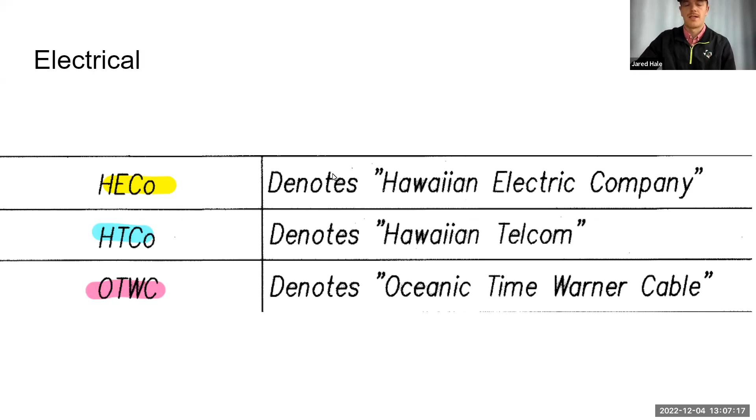The electrical takeoff is separated into three main companies: the Hawaiian Electric Company, denoted by yellow, the Hawaiian Telcom, denoted by blue, as well as the Oceanic Time Warner Cable, denoted by pink, as we'll see in the next slide. So throughout the project, we'll be excavating and installing three separate electrical duct lines.

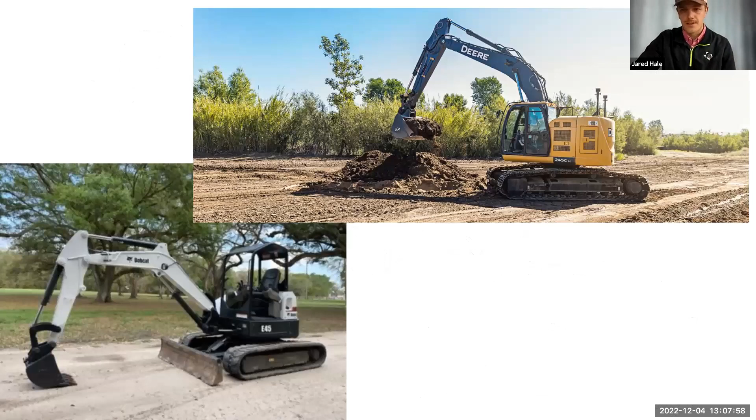The equipment that we'll be using to excavate the electrical ducts are the excavator and mini X. Where the lines are connected, all three of them together, we'll be using the excavator. And for when they're separated, as you can see in the middle of the page, we'll be using the mini X, and we'll be able to do this and save money and do it in a timely fashion.

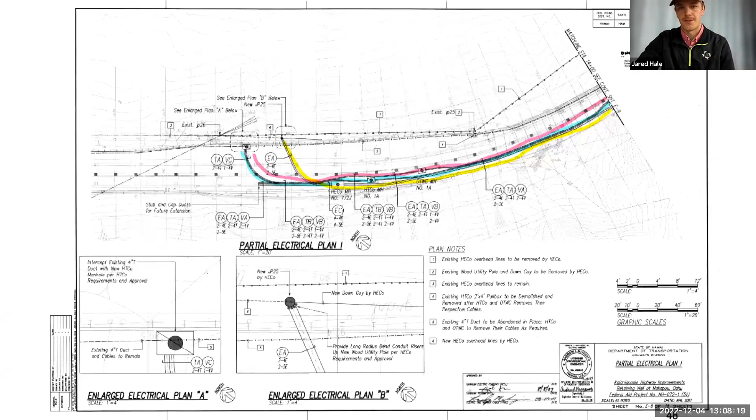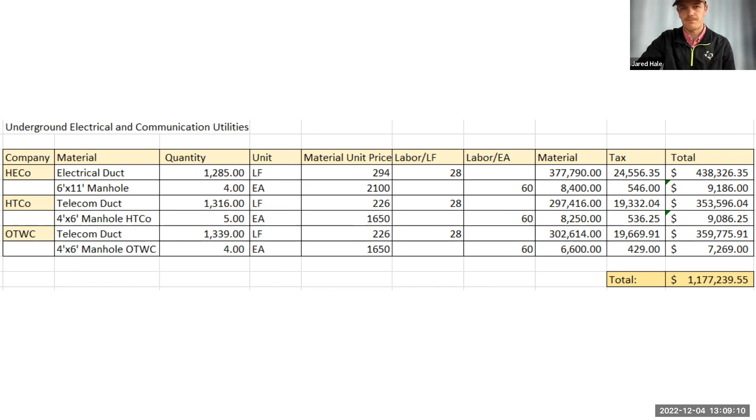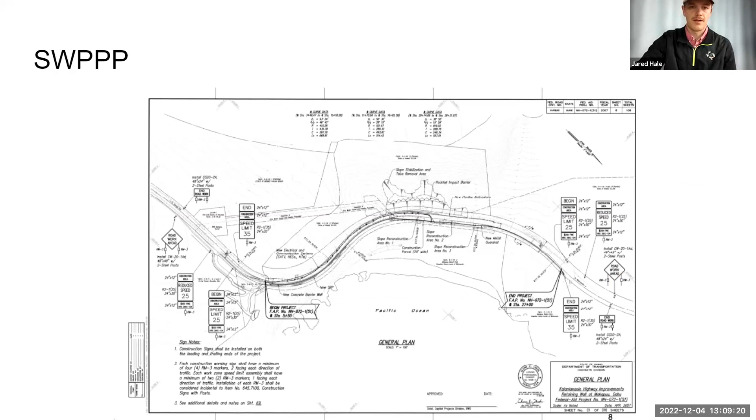Next we'll go over our SWPPP. This is just a picture of the general plan of our project. The SWPPP is separated into three main BMPs, best management practices: first, the filter berm, next, the silt fence, and finally, the temporary and permanent seeding.

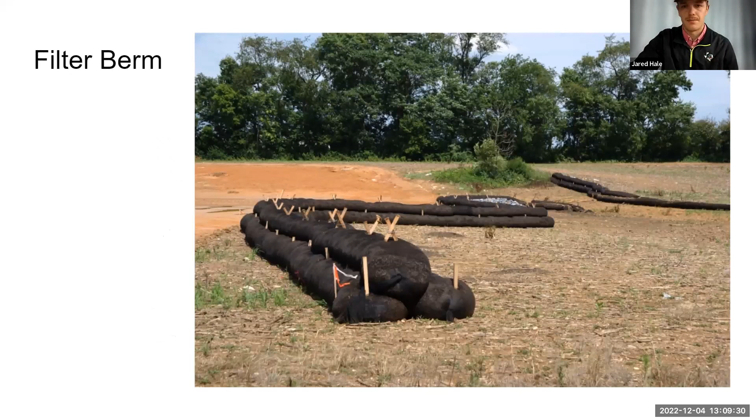The temporary and permanent seeding will be planted throughout the project along the sides of the roads, and this will help with sediment buildup and sediment pollution.

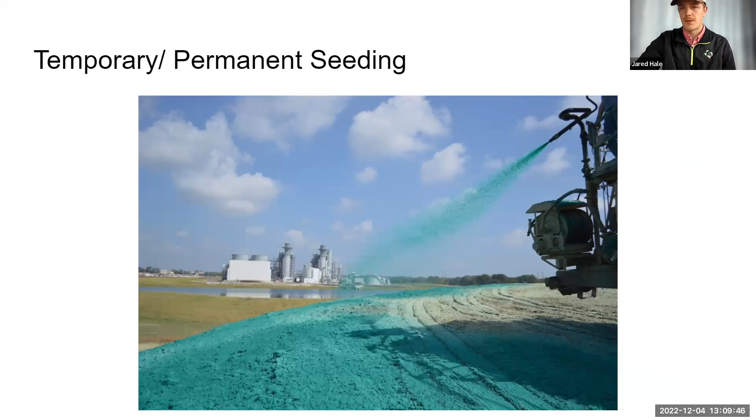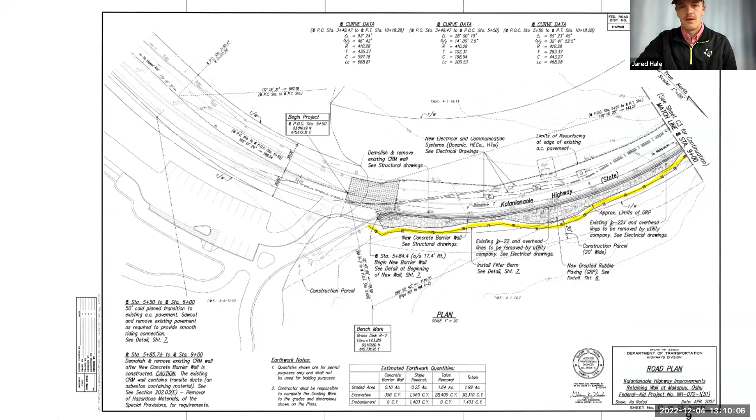So in order to keep these different BMPs in line and keep them viable, we have set up a plan to make sure that those things stay properly installed. At least once a week, we will be checking and inspecting the BMPs, and then within 24 hours of a rainfall of half an inch, after we found something that may need to be fixed, we will need to fix that within 24 hours.

We will be checking the silt fence for holes, and if sediment is up to 1/3 of the height of the fence. Temporary seeding will be checked for bare spots, washouts, and healthy growth.

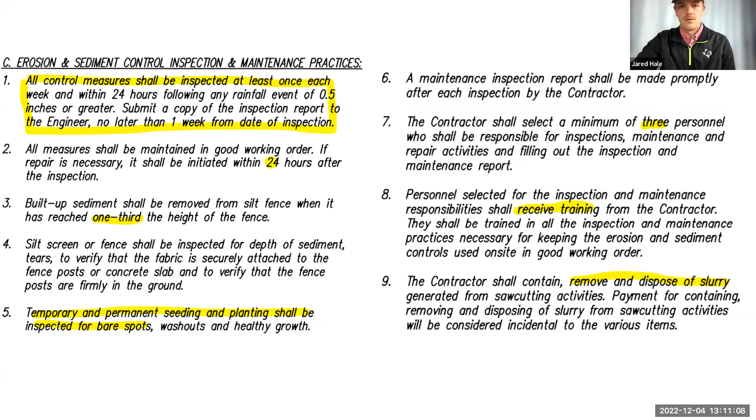The contractor, which is us, shall select a minimum of 3 personnel to inspect these, and the contractor will give training for them. And then finally, we will be removing and disposing of any slurry that may come from construction practices. We look forward to working on this, and we plan to continue to keep Hawaii a safe place and a beautiful place with our SWPPP plan.